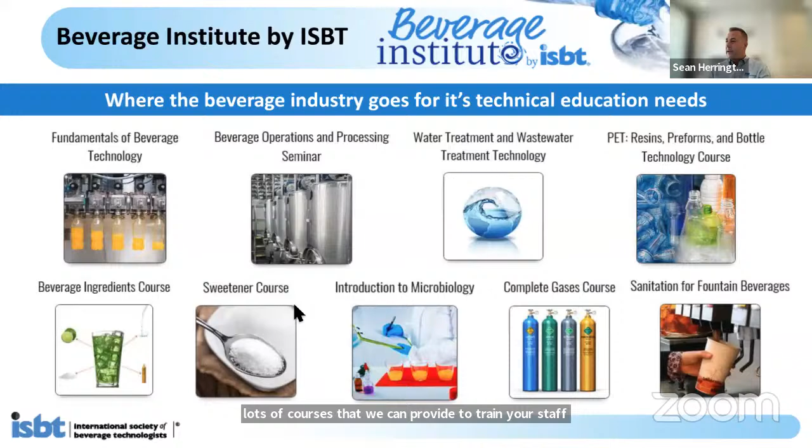So basically, ISBT is where the beverage industry goes for its technical educational needs. And we've got lots of courses that we can provide to train your staff if you have staff, or train yourself if you want to learn about a new aspect of the beverage industry. We're affiliated with many international beverage related organizations, as you can see on the screen here.

We have our main BevTech conference this year on May 6th to the 8th in Orlando, Florida, and you'll have about 350 technical experts there to connect and network. And this is all part of the membership that you subscribe to. You get access to this conference.

We have ISBT in Europe as well, LATAM, and as I said, we have ISBT BevTech Asia Pacific, which is my responsibility. And you can join ISBT quite easily through the website, and you'll be able to get access to all of the information related to ISBT and ISBT guidelines for the beverage industry. So please check our website and you'll get more information there.

So the content of my presentation today is, first of all, we're going to look at where your CO2 comes from, the traditional sources of CO2 and the emerging sources of CO2, because this landscape is changing rapidly, and I'll explain the reasons for that. We're going to discuss beverage gas quality and the food safety strategy that you can put in place to ensure that you produce a high quality beverage and maintain food safety. And then we'll do a bit of a deeper dive into CO2 polishing filters and their role in protecting beverage quality.

So where does the CO2 come from? Well, traditionally, CO2 has come from a number of fossil fuel sources. So probably the most common is fertilizer manufacturing, ammonia fertilizer, then hydrogen production, fermentation, combustion, and various different petrochemical sources of CO2. Now, all of these sources require, at some stage in the process, fossil fuel, i.e. natural gas or coal, to power the process of producing the CO2. Another common source, only in certain parts of the world, are natural wells. And of course, these are not fossil fuel because the CO2 comes out of the ground.

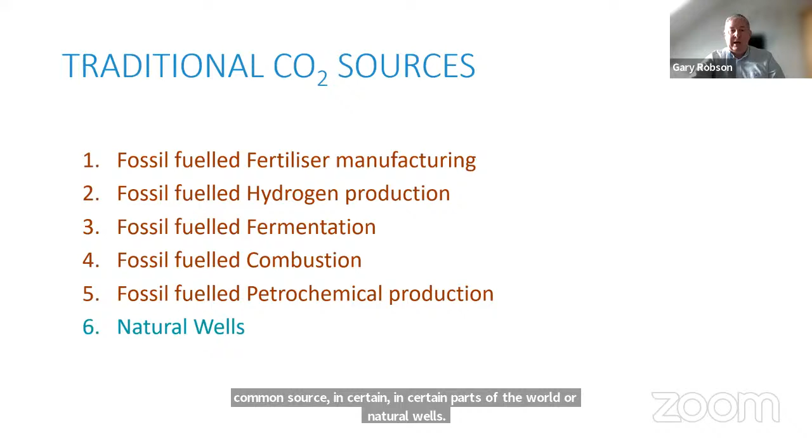So the disadvantages of traditional sources: first of all, they're primarily a byproduct. So if we take the fertilizer source, CO2 is a byproduct of that fertilizer production process. Of course, they're reliant on fossil fuel, and they're often seasonal. Manufacturing of the primary product can affect the supply chain of the CO2 from those sources. And this is very common in ammonia fertilizer, where it's only produced in certain months of the year. And in those other months, when it's not in production, then you have these problems with supply chain disruption.

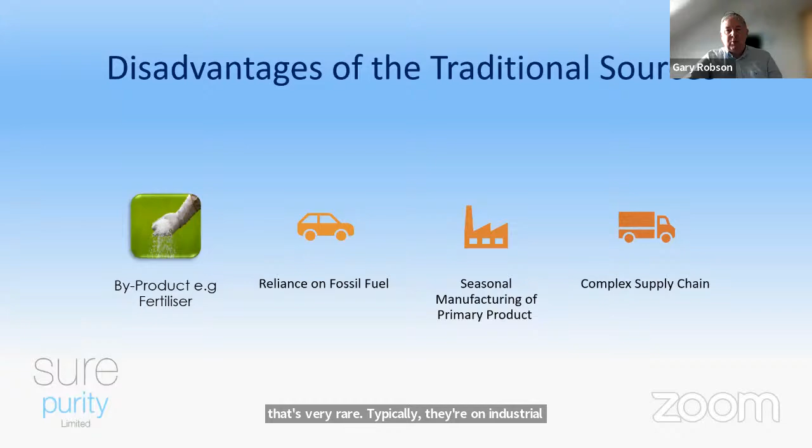The other effect of some of the traditional sources is the complex supply chain. So a lot of these sources are not traditionally near the beverage production. In some cases they are, but that's very rare. Typically, they're on industrial parks, far away from the population centers where you find the beverage production facilities.

But this is changing, and why is it changing, and why is there urgency to develop the new sources? Well, there's a number of influencing factors here, societal, political, economical, but the main pressing reason here is environmental. So climate change, the greenhouse gas reduction goals. COP28 this year launched a number of initiatives at government level for all governments around the world to accelerate the greenhouse gas reduction goals. And you're seeing the effect of this happening right now.

The other thing that's influencing this is carbon credits or fine avoidance on emissions. So a good example of this is New York City law, Local Law 97, which is coming into effect next year. And this requires any operators of large buildings, the landlords or the development companies, to reduce or eliminate the emissions from these large buildings. So if you think about Asia, there's a lot of cities with very tall buildings, and these could also follow New York's example of requiring a reduction or elimination of emissions from large buildings. Typically, these are coming from the centralized heating systems, which, for example, in New York, are all powered by natural gas.

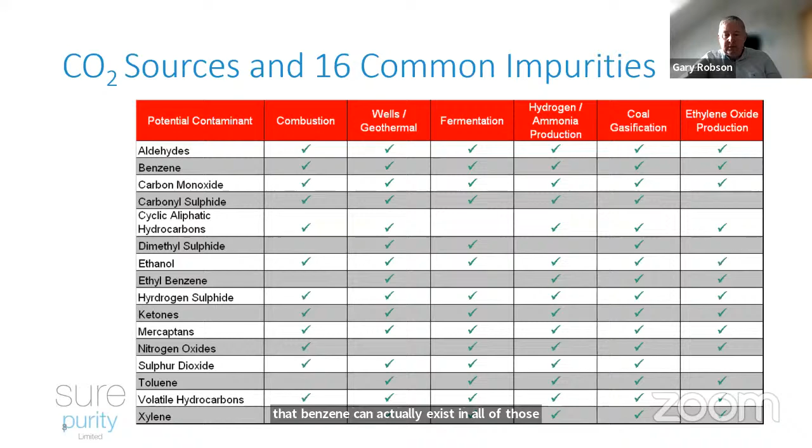Trace impurities in CO2 can cause a number of sensory negative impacts on your beverage. If I take just the four common ones, acetaldehyde, this is ever present in fermentation sources. And acetaldehyde presents an apple off flavor, which is probably fine if you're producing apple cider, but you certainly don't want it in a lemon lime beverage or even a carbonated water, where it would be even more distinguishable.

DMS and sulfur content, this is also extremely common. DMS you're going to find in typically fermentation sources, and particularly where it's a brewery, and it's the most common, I would say, contaminant in breweries that are fermenting and producing light lager, which is the #1 type of beer in the world. And the pale lager, highly carbonated beers you find around the world can produce the corn, sweet corn off flavor in some beers. Again, not something you want in your soft drink.

And then benzene, I already mentioned that this is probably the most common around the world. It causes the most problems. It is a toxic carcinogenic compound, and it is highly regulated. So this should not be in the CO2 at all. And it is also tightly regulated by the beverage brand owners and the CO2 producers, with the lowest regulatory permitted limit of 20 parts per billion.

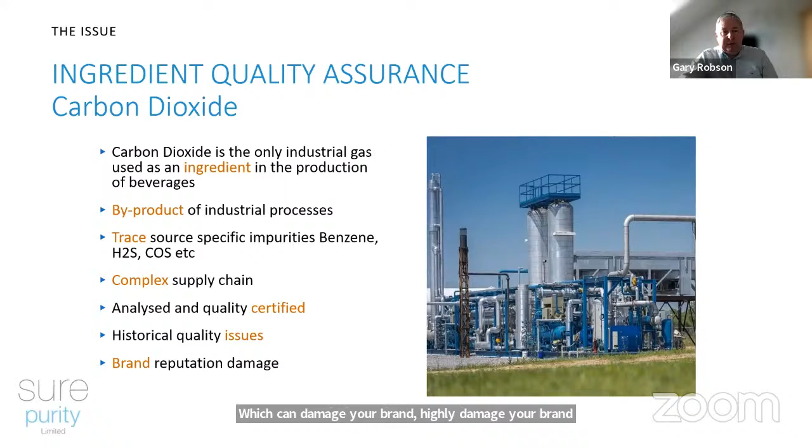This is important because there's been a number of historical quality issues, some of them pretty major events that have attracted very negative publicity, which can damage your brand, highly damage your brand. And with the speed of social media these days, that's even a higher risk.

So the developing new sources of CO2: first of all, we have biogas upgrading. This is probably the fastest growing new source of CO2, particularly in Europe and Western Europe and the UK. We're seeing an explosion of this production source, primarily for the biomethane. We had some major influencing factors in Western Europe because the war between Russia and Ukraine was affecting the natural gas supply chain. So there was another need really to accelerate the biomethane production that we see today. So this is on a huge growth curve, and doesn't look like it's going to slow down anytime soon.

And then there's direct air capture, which is gaining some traction, but is not quite exploding in the way that biogas is today. And then you've got also carbon capture from various emitters, so power stations, anywhere where you've got a source of CO2 that has high enough volume with a good enough starting purity to be able to purify and produce merchant grade CO2 in various different grades.

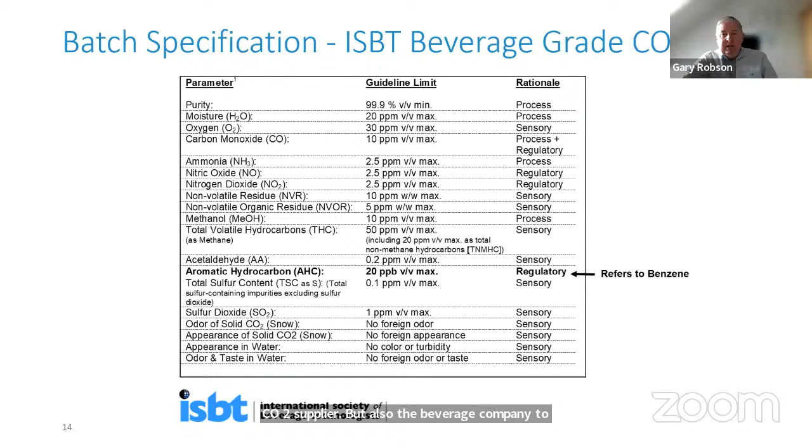So a lot of this on here, if it's a chemical impurity, can be monitored with a CO2 analyzer, a chemical analyzer. But there's a number of items on here like the appearance in water, the odor and taste in water. These are a manual test that should be done by the CO2 supplier, but also the beverage company, to ensure there are no sensory impacting impurities present in the CO2.

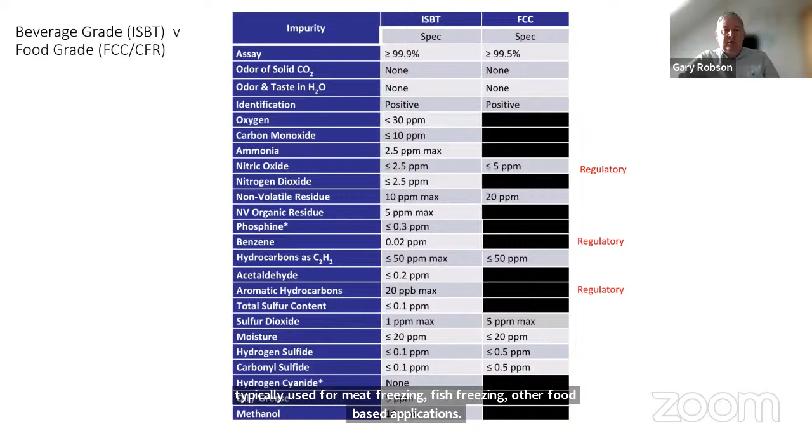of analysis. Things like acetaldehyde, aromatic hydrocarbon, and benzene, total sulfur. So these all should be included in the batch report and be able to be inspected at any time by the beverage company. So we always recommend not to buy food grade for a beverage application, because food grade CO2 is typically used for meat freezing, fish freezing, other food-based applications, where the CO2 is not actually used as a carbonating ingredient.

So quality from the beginning to the end, the gas source, the quality must begin at the source. Even monitoring the quality of the gas from the raw gas that's produced by the CO2 supplier. The raw gas producer and the CO2 company must always be in frequent communication and must always understand if there are any changes at all in the raw gas analysis, because that can affect the performance of the CO2 purification system from your supplier.

And you must understand also the seasonality changes or any new raw material variability that can affect that raw gas analysis and quality. A good example of that is sugar beets, where sugar beets are harvested twice a year, and the moisture content is different between the spring sugar beet and the fall or the autumn sugar beet, and this can have an impact on the quality of the CO2. So this all has to be considered in the process plant design in the CO2 purification system.

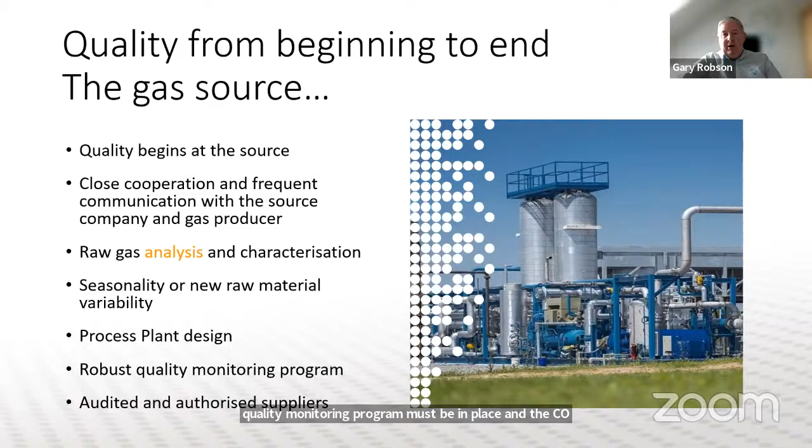A robust quality monitoring program must be in place, and the CO2 supplier must often be audited and only issued with an authorization to supply beverage grade CO2. The process plant design must be based on a worst case scenario with multiple raw gas samples tested, so a good fingerprint can be established and you must understand what could be in your CO2 at certain times of the year. The scrubbing and purification choices are then based on the best engineering practice, and so often it can be a proprietary design of the manufacturer.

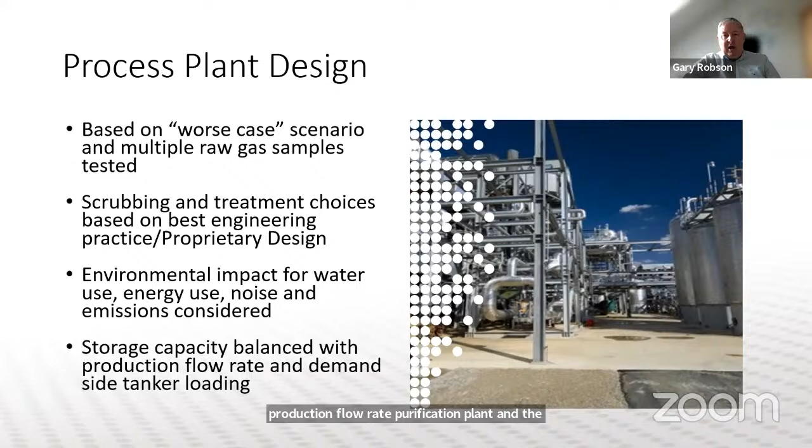You must think about the environmental impact for water use. You must think about energy use, noise and emissions. These must always now be considered and be high on the agenda for building a CO2 recovery plant. The storage capacity must be balanced with the production flow rate, i.e. the raw gas flow rate, the production flow rate of the purification plant, and the demand side. So how many tankers can be loaded on a daily basis.

At the CO2 production plant, the quality of the CO2 must always be monitored. A full list of impurities must be monitored in the batch. And the first place to start monitoring is the liquid to storage pipeline. This is the main pipeline feeding the tanks. So you can have an early warning if something is not right with the CO2 before you would contaminate the

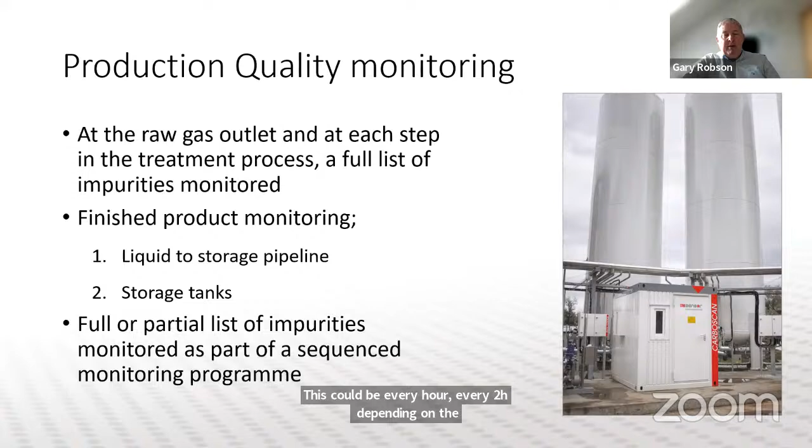tanks. You must always monitor the quality of the CO2 in the tanks because that's where your batch analysis is going to be completed. And you must have a full or partial list of impurities monitored as part of a sequenced and regular monitoring program. This could be every hour, every 2 hours, depending on the programming of the CO2 analyzer. So batch analysis, a full list of impurities must be monitored.

Best practice is to create a discrete batch analysis. You isolate the batch, release only after the test has passed, and then you identify this with a unique serialized ID and record this for future reference or for auditing. You can control the product flow in isolation with a PLC and direct communication to and from the analytical system and sequence that within the program. We recommend always having a high level warning at 80% of the specification, and that can provide an early warning if something goes wrong.

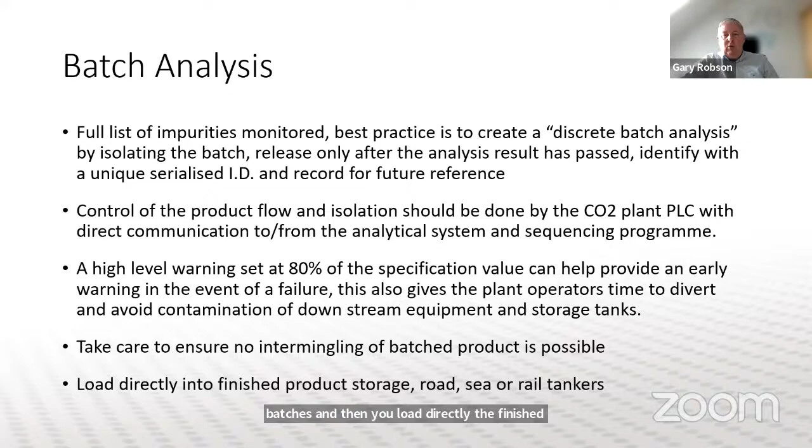Take care that there's no intermingling of product between batches, and then you load directly the finished product into the truck or a rail tanker. Every delivery must come with a certificate of analysis and a COC, a certificate of compliance, if you're a beverage brand owner and you require this, and this is a legal document that forms the contract between the supplier and the client.

The compliance statement must require detailed information about where and when the product was produced, by whom, record the batch ID, the vehicle ID, seal numbers. So all of the inlets and outlets on the tanker must be sealed with seal security numbers, ID numbers, and they must be recorded, tamper evidence seals. Driver ID and a statement that this is the full delivery and not a partial load. So this is the standard procedure now for delivering beverage grade CO2 to a beverage producer.

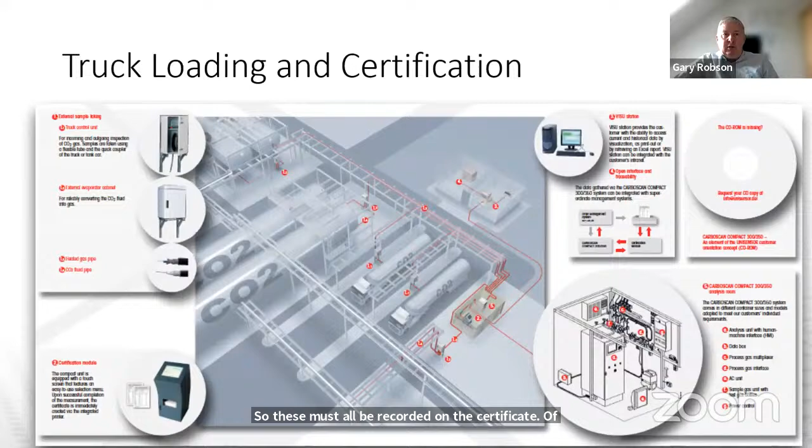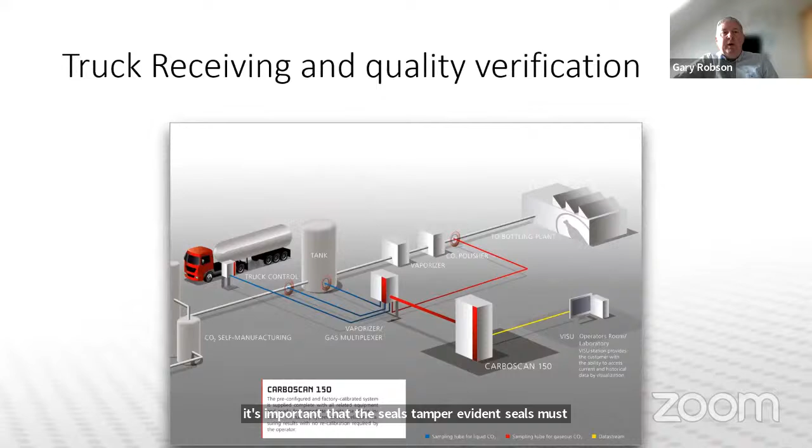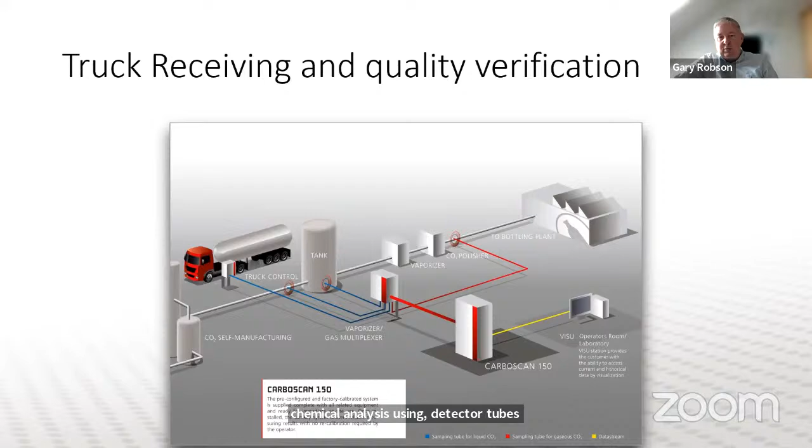Here's a quick overview of a truck loading and certification system. Again, the delivery vessel security, it's important that the seals, tamper evidence seals must be applied, and they must be serial numbered, and these must be recorded. When you receive a delivery of CO2, the quality must be verified. You can do this with an on-site CO2 analyzer, or you can do a simple sensory test and then do the remaining chemical analysis using detector tubes. But of course, it's much easier just to do it with an on-site analyzer. It's quick and easy and automatic.

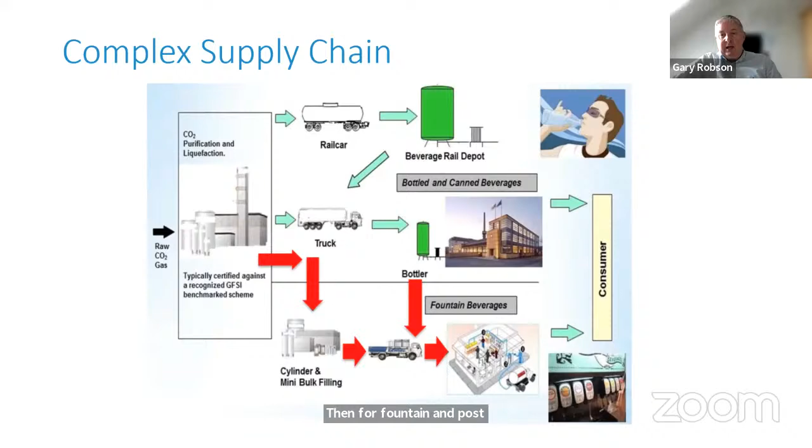The reason for that is because the supply chain of the CO2 is quite complex. There's a number of opportunities here for cross-contamination, and you can see from the beverage production facility on the left, by the time the truck gets to the beverage production facility, it could have gone through 2 or 3 changes of hands. If you're a restaurant operator and that CO2 is then broken down into smaller batch cylinders or mini bulk delivery, then for fountain and post mix, it can go through even more hand changes. So opportunities for cross contamination.

So all that being said, yes, we understand the risk of CO2, but there are a number of things you can do to protect yourself as a beverage company. And one of them is using multi-barrier polishing filters. These can remove all of the chemical impurities and the sensory impacting impurities that can be found in CO2. By using them, it ensures compliance with the global brand owner requirements. It standardizes the key ingredient, CO2. It prevents contamination of the carbonated beverages. It certainly prevents consumer complaints and any potential brand damage, any sensory defects, and avoids costly recalls.

The CarboGuard system from Sure Purity removes all of those impurities listed in the ISBT and the global brand owner requirements. In addition to that, there's enhanced protection with the carbonyl sulfide barrier. So this is quite important when the CO2 is coming from some of the newer sources, because these can have high levels of COS. The system works by continuously polishing, so continuously removing the trace impurities that are always present in the deliveries of the CO2, but it also protects you in the event of a spike or a quality incident, and it will protect you up to 10 times the brand owner specification.

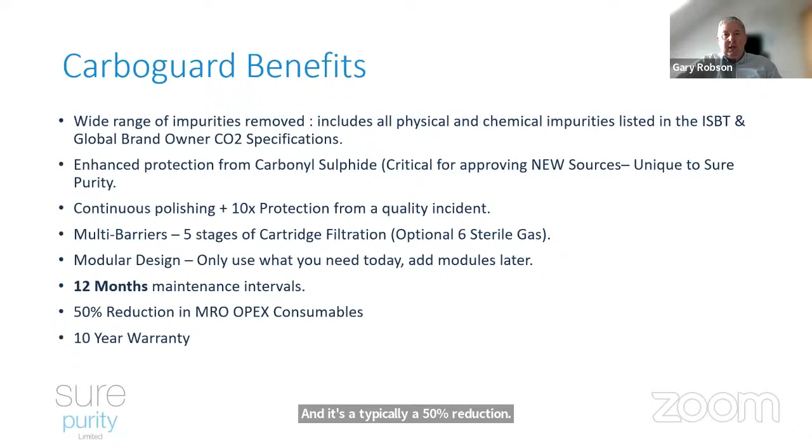The system is designed using a modular design technique. It only uses the capacity that you need today. And because it's modular, you can add on additional modules as you're adding extra lines. The system works with a 12 months maintenance interval, and it's typically a 50% reduction in your OPEX consumables compared to traditional CO2 filters. And the system comes with a 10-year warranty.

So this is a quick overview of how the system works. You can see you have stage 1. This is cleaning the CO2 of any physical impurities like NVR, NVOR. What that stands for, that's an ISBT term, non-volatile residue and non-volatile organic residue. These are removed here at stage 1.

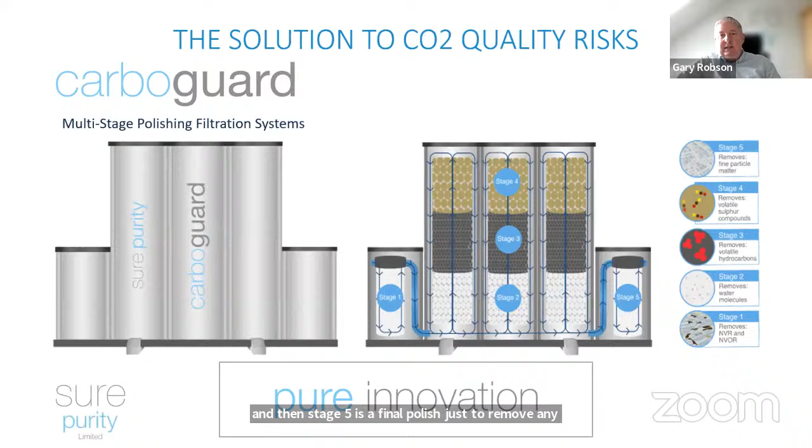This is typically oil, dirt, rust, grease, plasticizers, because liquid CO2 is an excellent solvent and it can strip the plasticizers out of rubber hoses and seals. Stage 2 is removing moisture and some light hydrocarbons. Stage 3 is removing the volatile hydrocarbons, including benzene. Stage 4 is removing the volatile sulfur compounds. And then stage 5 is a final polish just to remove any fine particles, which then leaves the CO2 completely pure and free of any impurities.

It's a cartridge-based system, CarboGuard, and we're using a snowstorm filling technique. The snowstorm filling technique ensures an equal resistance to flow through the media beds, and this ensures maximum contact time between the CO2 and the media, and ensures that no bypassing or channeling, like you can see on a traditional bed, can take place. It's 12% more efficient, and it enables us to get more media into a smaller space.

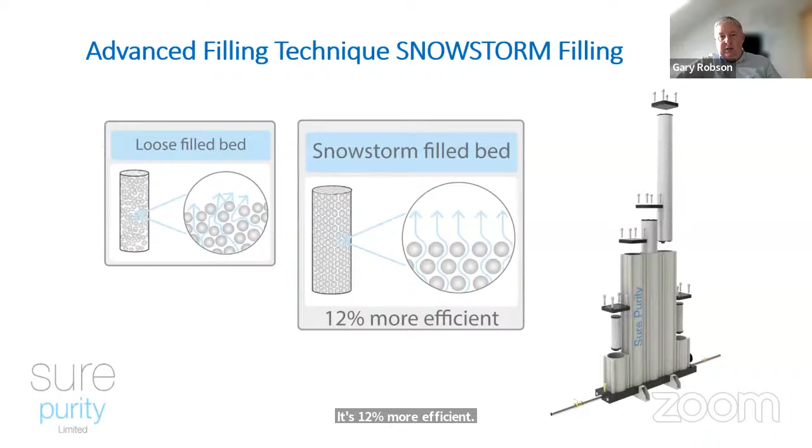The unique COS barrier is used to stop any carbonyl sulfide from passing through the bed, through the filter. This is important because COS is extremely difficult to remove. Many CO2 companies cannot remove COS in much more than very small trace amounts, because it can quite easily overwhelm and overcome the CO2 purification process. So this media was specially developed by Sure Purity, and it has excellent properties for the continuous and permanent containment of COS.

So the brand owner requirements: for example, Coca-Cola has required every one of its bottlers in the world to use multi-barrier polishing filters since 2001. PepsiCo also followed in 2018, and they also require all of their bottlers or contract fillers, co-mans, to have the multi-barrier CO2 polishing filters. And this is because it has prevented many quality incidents from occurring.

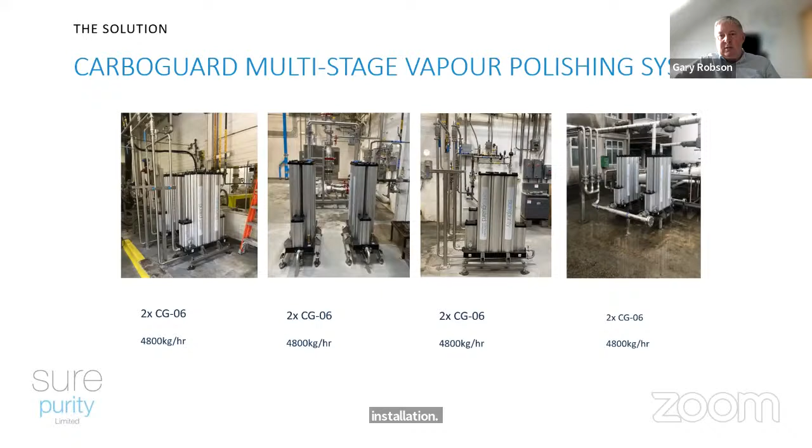So here's a few pictures of some installations around the world. You can see that it's a really nice, clean installation. These are a couple of duplex installations where the customers have chosen to install 2 systems on the same CO2 plant. And these can be easily configured and connected using an end-fed manifold pipe arrangement, which you can see here in the middle picture.

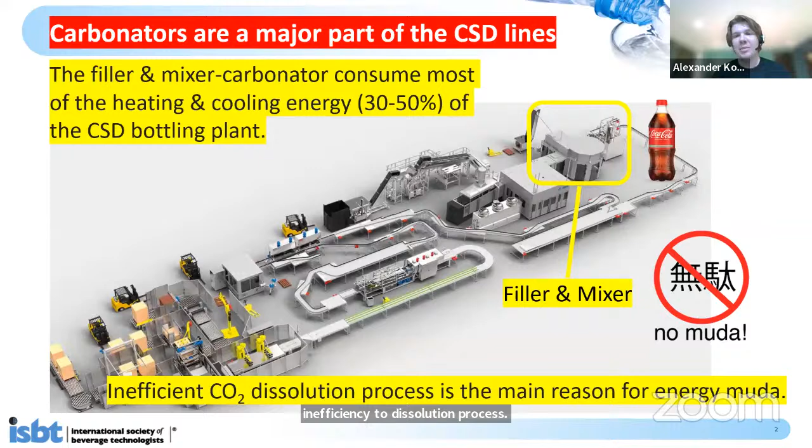The problem is that during the process of manufacturing, somewhere between 30 to 50% of heating and cooling energy is consumed in the bottling plant. This is an enormous amount of muda, an enormous amount of waste, and the reason for this waste is the inefficient CO2 dissolution process. So basically, the carbonation process is responsible for most of the energy waste in the plant.

You may ask the question, what is a bad CO2 dissolution? We may think together of the molecular structure of water as a sponge. So a bad dissolution is when the outer layer of the water molecules is carbonated and not the core. You may see that here are the CO2 molecules attached to the water drop. Let's say that this is a water drop, and the CO2 molecules cannot go inside the water drop.

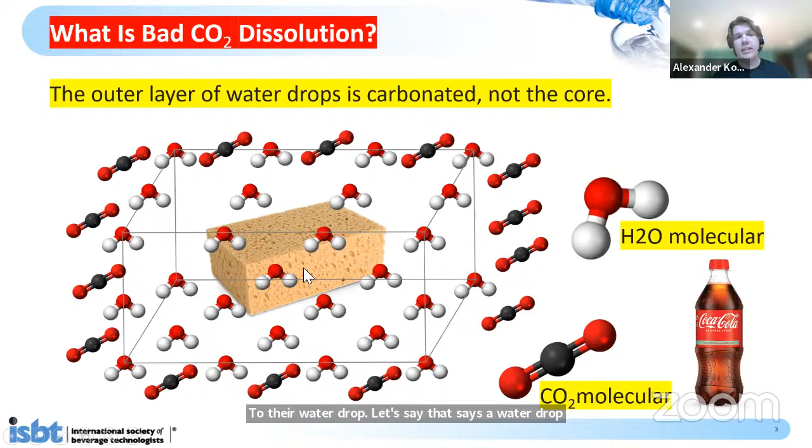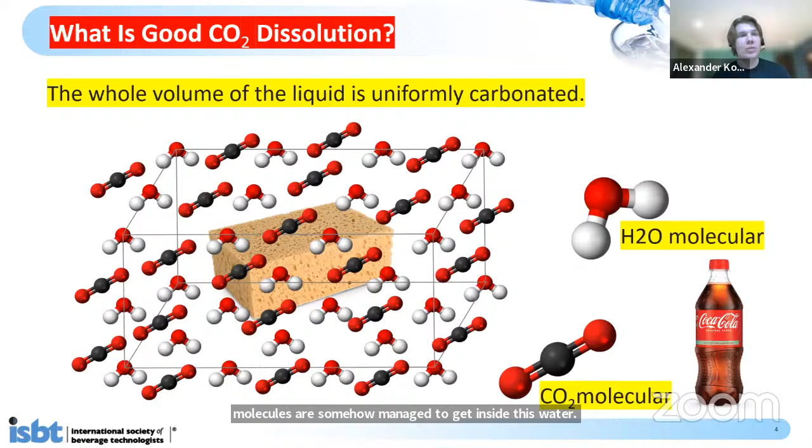This is bad dissolution. What is good dissolution then? A good dissolution is when CO2 molecules somehow manage to get inside this water drop. It means that the carbonation is uniform, the whole volume is uniformly carbonated. This is a good CO2 dissolution. There are a couple of ways to improve CO2 dissolution.

The first and the most obvious one is to increase pressure, as according to Henry's Law, the increase of pressure improves dissolution. This is quite costly, and it also causes some wear and tear on your production equipment, especially on the filler. The fillers become worn out easily when the pressure is high. The second thing to improve the CO2 dissolution in beverages is to apply cooling. This is also an obvious step, which requires a lot of CapEx and OpEx expenditures, although most of the plants have some sort of a cooling system. It's OpEx because you need to spend energy for the cooling process.

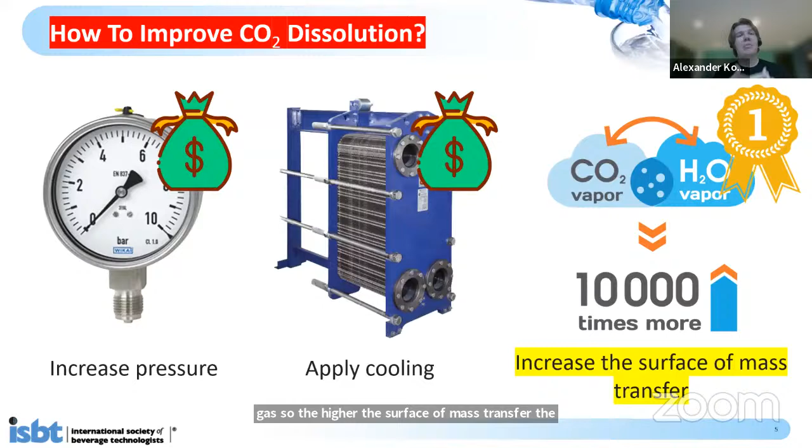And the third step, which is also obvious, I must say, is to increase the surface of mass transfer between the liquid you are trying to carbonate and the CO2 gas. So the higher the surface of mass transfer, the better the carbonation, the better the bonding, and the better the CO2 dissolution. And obviously, there are different apparatuses and processes such as injectors, ejectors, static mixers, which are used to increase the surface of mass transfer between the liquid and gas. They work with varying degrees of success.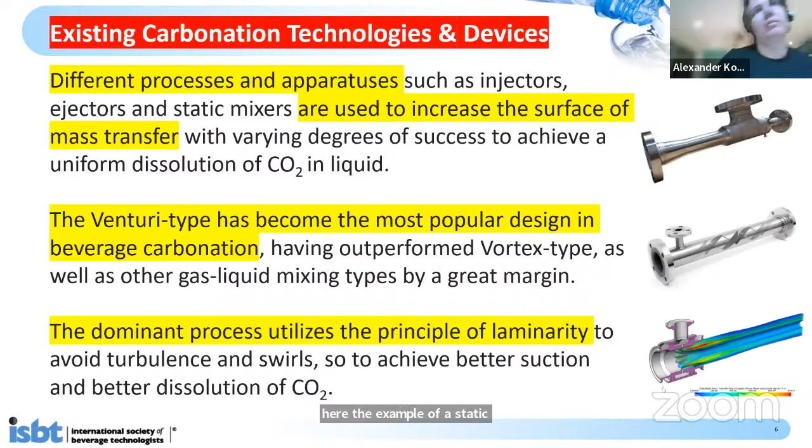Currently, the most dominant design is the ejector type machines, which utilize the principle of laminarity, the Venturi type machines. And they have outperformed the static mixers. You may see here the example of a static mixer, and the static mixer is sort of outdated, old age technology. Let's focus right now on the new technology, which is currently on the market.

It's the subcarb technology. It's a patented technology and apparatus, which is designed, contrary to the ejector type machines, for very high turbulence, very high pressure drop in line, and it's designed to achieve a speed of the liquid higher than the speed of sound in this liquid. It means supersonic speed. When all three conditions are met, we achieve the effect of cold boiling. It means that we vaporize any liquid like Coke, Pepsi, or mineral water, any liquid you'd like to carbonate, and you mix gas with gas.

Basically, the subcarb technology allows carbonating gas with gas, because think of Venturi. Venturi is carbonating liquid with gas. It means that it's carbonating water drops of smaller size. So the smaller the size of the water drop, the better. And it is still liquid.

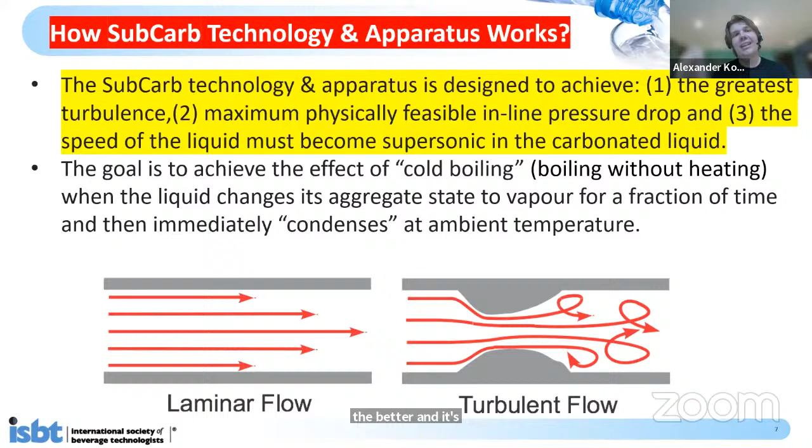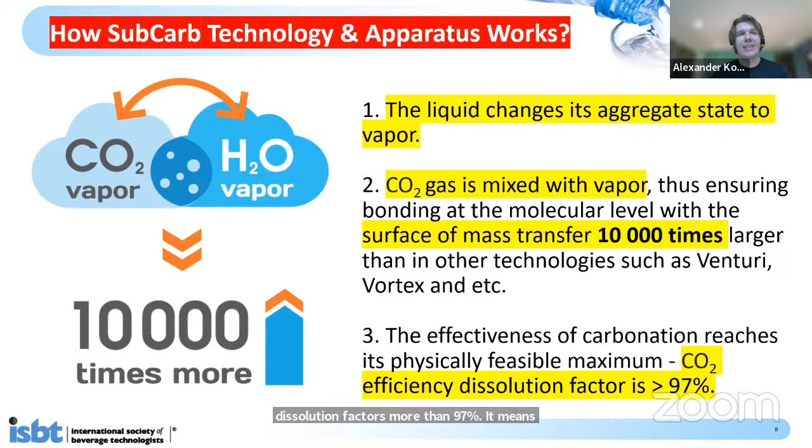In the case of the subcarb, it's gas mixed with gas. That's the main difference. Basically, in the subcarb technology, the liquid changes its aggregate state. CO2 is mixed with vapor, and the dissolution efficiency factor is more than 97%. It means that the theoretical level of CO2 dissolution has now been achieved in practice.

Let's say that we get a lot of questions: what does 97% efficiency mean? I have stated it, but this is a CO2 dissolution table. Let's say a couple of words more.

And Henry's Law says that 4.6 bars, this is the pressure scale, 4.6 bars of gas counter pressure in your filling machine allows you to fill Coca-Cola products, let's say, or PepsiCo products, it doesn't matter, just for the reference, with 4.2 volumes of carbonation. So 4.6 bars allows you to hold 4.2 volumes of carbonation at 25 degrees filling temperature.

Normally, it's impossible to fill at this high temperature in reality. Yeah, but theory says it's possible. And when is it possible? You need two factors. The first one is that the carbonation technology must deliver 100% efficiency. So it means that the theoretical efficiency is in reality the same as the real efficiency.

And when the filling technology doesn't have design flaws. Obviously there are different types of filling equipment, volumetric machines or mechanical machines; volumetric machines are way better. But nevertheless, Henry's Law says that it's possible to fill at 25 degrees Celsius. It's net zero manufacturing. It's not even ambient temperature filling, it's more than ambient temperature filling.

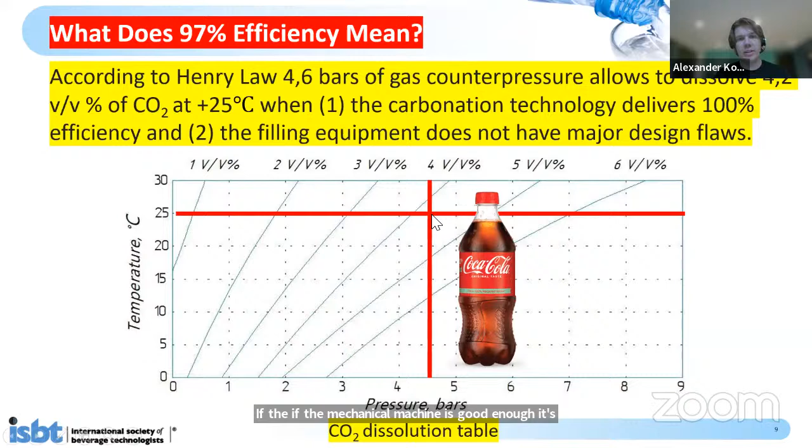And the modern beverage carbonation technology allows this, for example, in connection with volumetric machines or decent mechanical machines. If the mechanical machine is good enough, it's possible to achieve this filling temperature on very high carb products.

There are 3 steps. We'll go quickly through these 3 slides about the subcarb technology difference and how this super efficient dissolution happens. The first step is you need to convert as much kinetic energy to potential energy as possible. So you need very high speed in order to get extreme turbulence. This is contrary to any Venturi type ejector. In the Venturi type, you want all the flows laminar. In the subcarb technology, you need extreme turbulence.

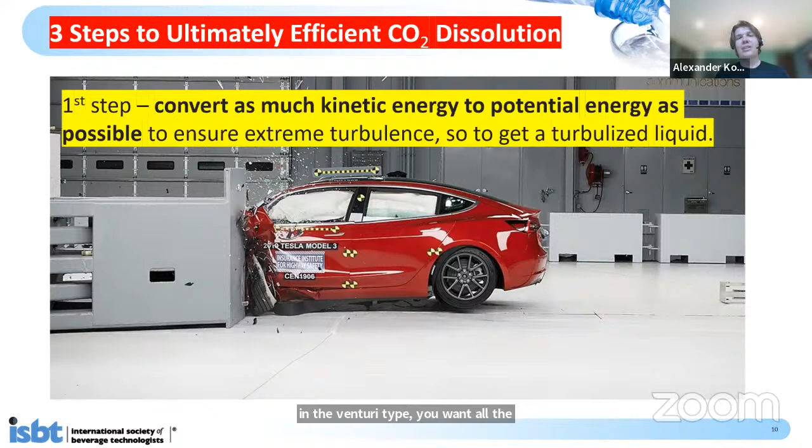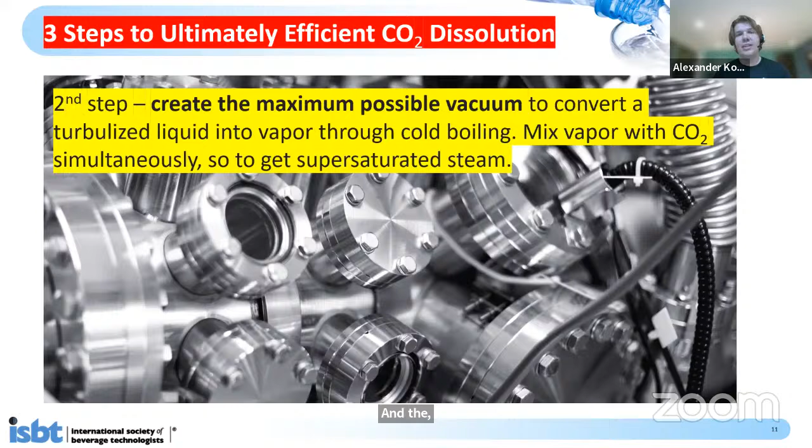Then there is a second step. You need vacuum, obviously, but the main difference between the subcarb tech, which is patented, and the Venturi type devices, is that the vacuum is created abruptly. It's an abrupt pressure drop. So first is the turbulent flow, then there is an abrupt pressure drop, and the liquid vaporizes. It means that it changes its aggregate state, and the new state is wet supersaturated steam. It means that it's gas.

Then the third step is that you need to somehow condense the components of the product back to liquid, because you have some precious formulation of Coca-Cola, PepsiCo. So you need to bring it back, and you need a very abrupt pressure increase, which is basically a hypersonic leap. It happens when a jet reaches the speed of 1 Mach, there is a hypersonic leap effect, and we condense the supersaturated steam back to liquid.

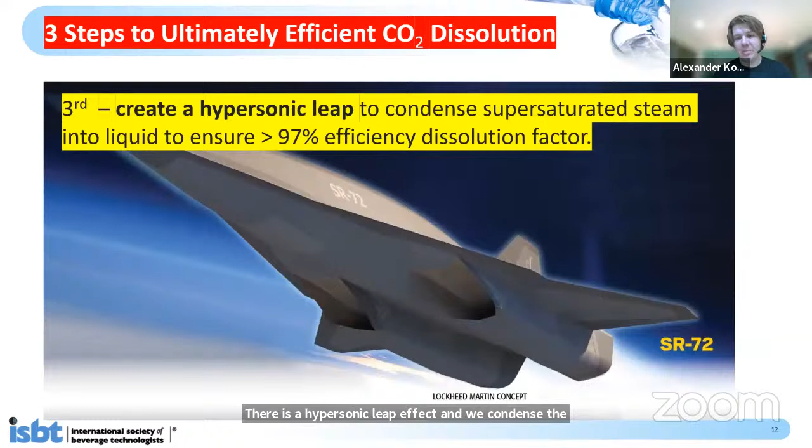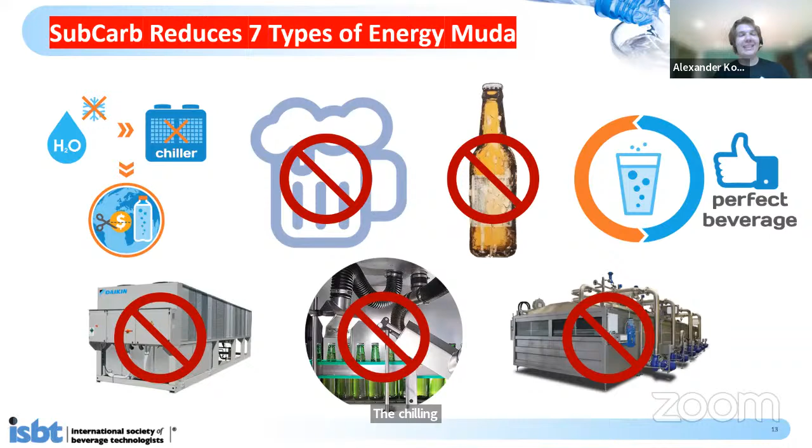What does it all mean for beverage manufacturers, the application of the new technology? It's the reduction in chilling costs, which is cooling energy, the reduction in heating energy, so the complete elimination of warmers, or like 10 or 20% usage of the warmer, the elimination of foam and condensate, the improvement in taste, and in case the facility needs to replace the chilling equipment, it can buy a significantly smaller one, or it doesn't need to buy one at all.

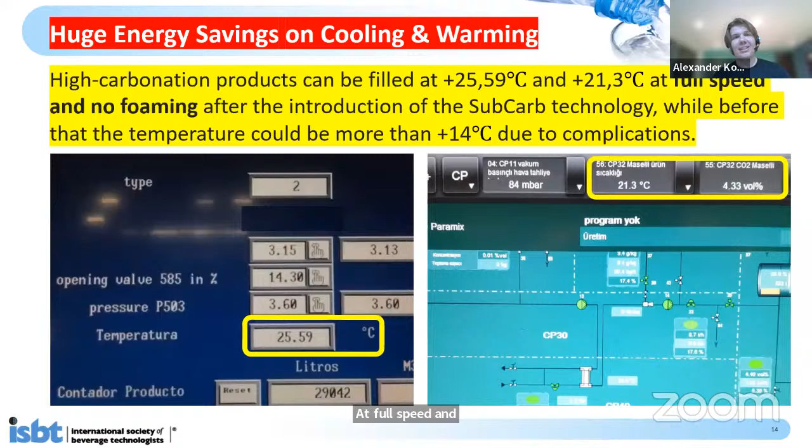So here are a couple of slides about the results that have been achieved around the world with the new technology, and in Asia as well, through many installations. This is the filling temperature, 25.5 degrees Celsius, or another example, 21 degrees Celsius, 4.3 volumes of carbonation. This is a typical Coke or Pepsi type drink. At full speed and no foaming, because speed reduction is obviously the greatest sin of all. Nobody will allow speed reduction. This is another example of a canning line, also very high temperature.

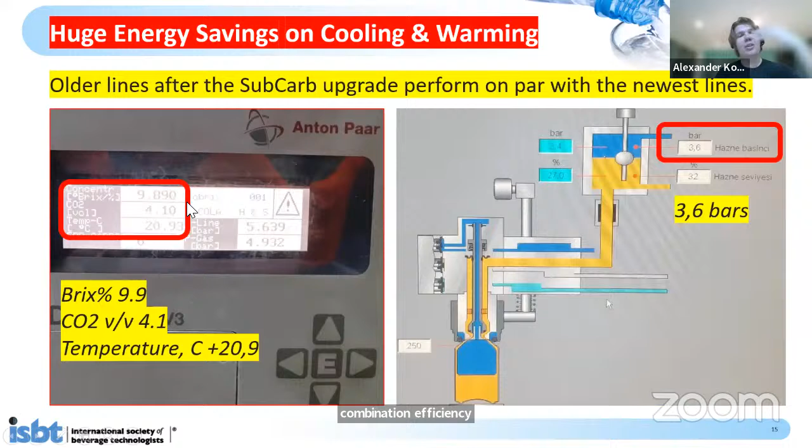This temperature helps us understand that right now, with the introduction of the new carbonation technology, the subcarb technology, the real carbonation efficiency is very close to the theoretical efficiency.

The very high savings can be obtained when you turn off the warmer completely or the chilling system completely, depending on the price. And this is an example that this can all be calculated very easily, depending on the efficiency of the chiller and the cost of energy in the particular region. Let's say in Australia, the cost of energy is very high, and the payback can come within a matter of months, depending on the production volume of your line.

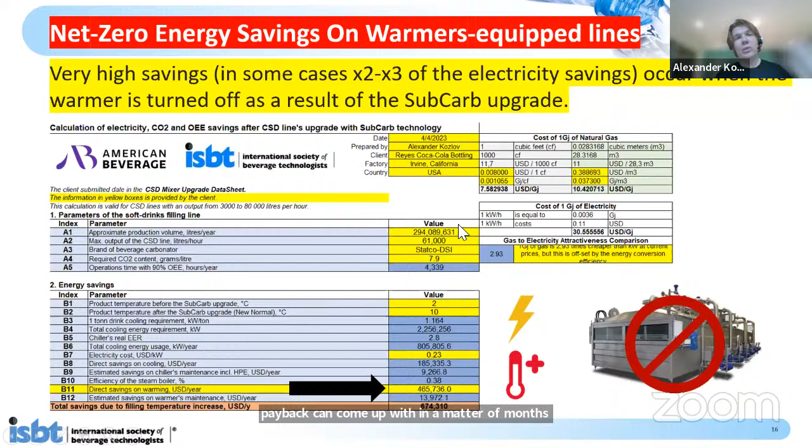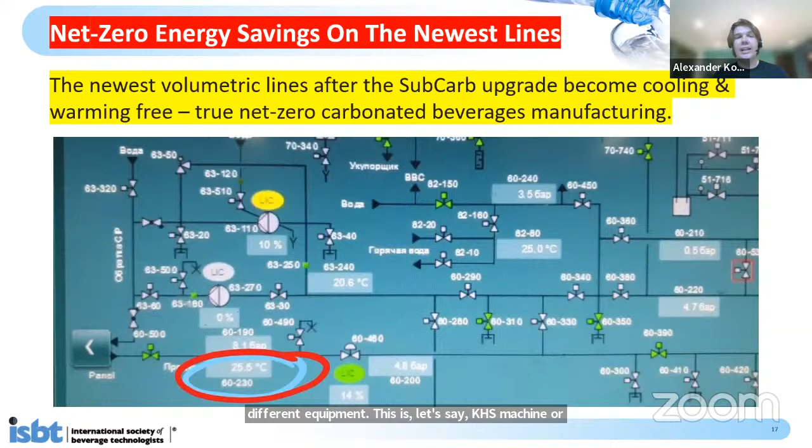Another example, 25 degrees Celsius, different equipment. This is, let's say, a KHS machine or Krones machine, whatever machine is typical for your operation. The improvement in quality, especially for PET containers, because of the better CO2 bonding. This is very interesting for hot climates, because during transportation, when the factory brings its product to the consumer or the supermarket shelf, temperatures can rise to 50 or even 60 degrees Celsius on a hot day, and the PET container can be deformed.

This is very important, especially in times of the global shortage. This is a typical layout of the two machines. This is a filling machine. This is the mixer carbonator. Both machines consume a certain amount of CO2. In the example here, both machines consume an equal amount of CO2, something like 10 grams per liter. This is true for canning lines in particular. And 100% CO2 efficiency is when whatever goes in the can is consumed by the machines, which is a rare case. Normally, this amount is lower than the total consumption by these two machines.

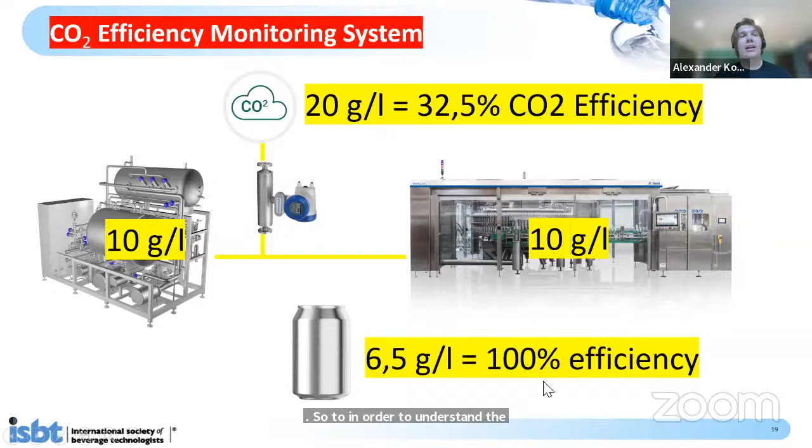This is an example of a simple system. You may see here the screen. This is a real example from a KHS canning line, 1,000 cans per minute, not a very fast one. The line consumes 600 kilograms per hour, which is a very, very big consumption. You can see to the left this indicator. This is the consumption of the filler, around 200 kilograms, and this is the consumption of the mixer, around 400 kilograms. And this is the total consumption, more than 500 kilograms per hour.

And after the introduction of the new subcarb technology, with all the parameters being the same, I mean product, speed, carbonation, you observe that the consumption became around 250 kilograms per hour, which is a very, very dramatic decrease. This can be true when the counter pressure gas in the mixer and the filler is CO2. When it's sterile air, the reduction of CO2 consumption is not that dramatic.

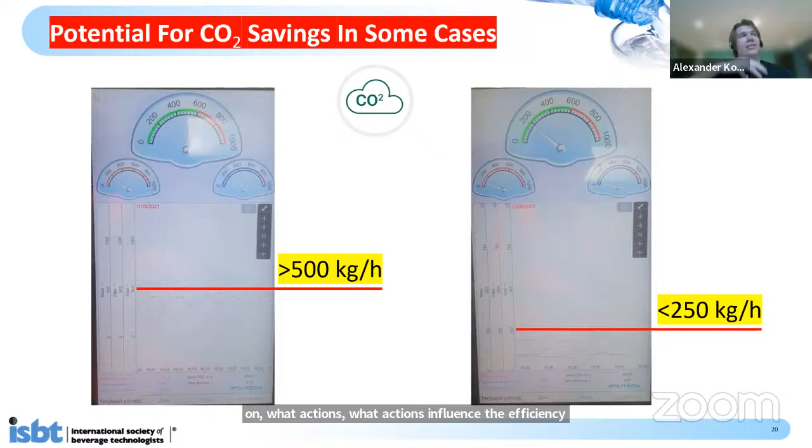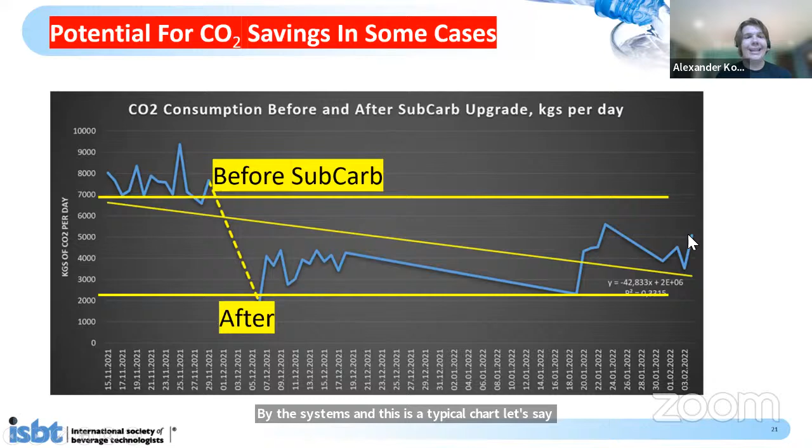So my value proposition is that right now, most plants have 3, 4, 5, even 6 lines. I've seen a plant with 12 lines in Mexico, and there is a big plant in Brazil. Each and every line must be equipped at least with a simple CO2 monitoring system, with all the data, historical charts and trends, so you can understand what's going on, what actions influence the efficiency. Is it the operator? Is it some fault? Is it leakage? Different charts can be generated by the system, and this is a typical chart. After the introduction of the technology, you observe a decline in CO2 usage.

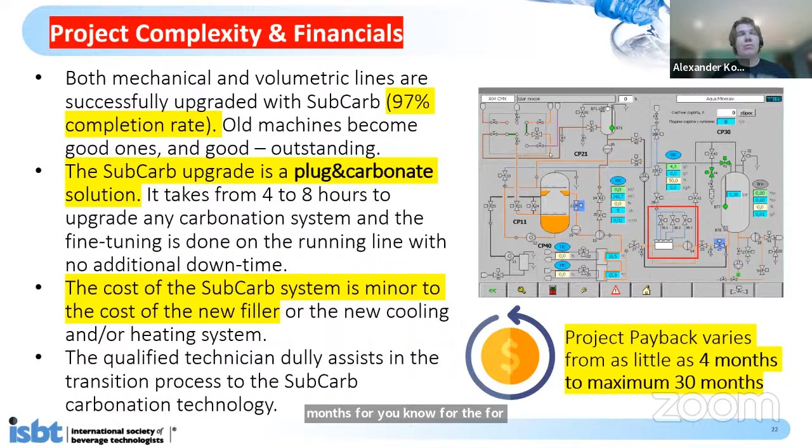If the operation is equipped with a very old machine like a Mojonnier type machine, Mitsubishi machine, or very old machine, these very old and sometimes bad machines, not because they are simply bad, but because they are outdated, will become good machines with the help of the new carbonation technology. The paybacks are pretty good as well, sometimes as outstanding as 4 months, and the payback never exceeds 30 months, and it depends mostly on the volume and the cost of energy resources.

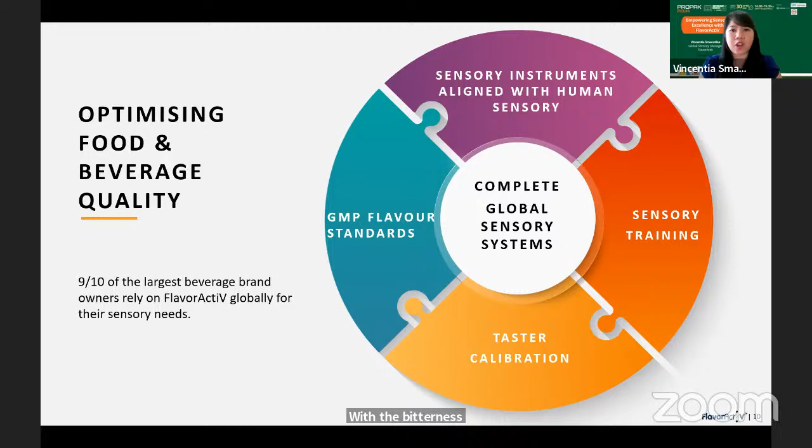So talking about the power of a sensory program. So what is the value? First, it is to protect the brand sensory quality, to promote product consistency, to reduce product variability and defects, staff empowerment in decision making, swift quality control, root cause analysis and troubleshooting, and new product development and recipe formulation.

And as a company, you can have some reflection on value by answering questions like, what does your sensory quality look like? Is sensory data discussed in the operations or managers meeting along with all other data? Are consumer or customer complaints reviewed and discussed relative to production or ingredient COA records? Does the word liking or subjective come up? So sensory is the tool that measures overall product quality and is often not given enough visibility.

That's why it's important to have a sensory program buy-in with the strategy and structure as below. So first, to assess organizational capacity, like the people, the space, the time and materials needed, and then elect a sensory champion that has the passion and skill set, also relevant job title, and establish the stakeholder buy-in with management support, a quality team, and also marketing involved. And last, to define goals. So what questions are you trying to answer with a sensory program?

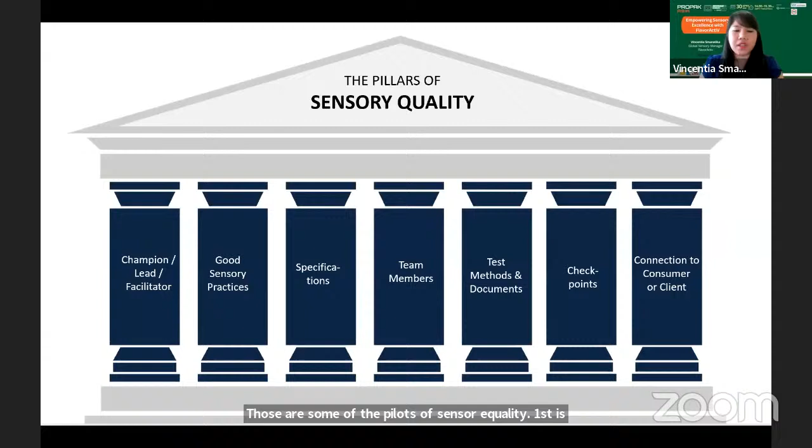Those are some of the pillars of sensory quality. First is the champion or lead or facilitator, good sensory practices, product specifications, team members, test methods and documents, checkpoints, and connection to consumer or clients.

And to have an effective sensory quality program, first, it needs to be feasible within staff and time restraints, integrated into the quality program, procedure, and daily activities, use appropriate methodology and decision criteria to provide actionable results, and build a sensory culture at all levels of organizations, have the right people with the right skills. And for a sustainable sensory program, it needs clearly outlined process and responsibilities, use the right methods and procedures, monitor and review, measure the team performance, and do reward and recognition of team performance.

And in sensory panel management, it's very important to pay attention to good sensory practices. One of them is environment. So have you got an environment that is free from distractions? An example here is the sensory laboratory. You need to have a separation between panelists. So you need to have separated tasting booths, which are also separate from the preparation area. Therefore, the panelists can really focus on the sensory evaluation, free from all distraction outside.

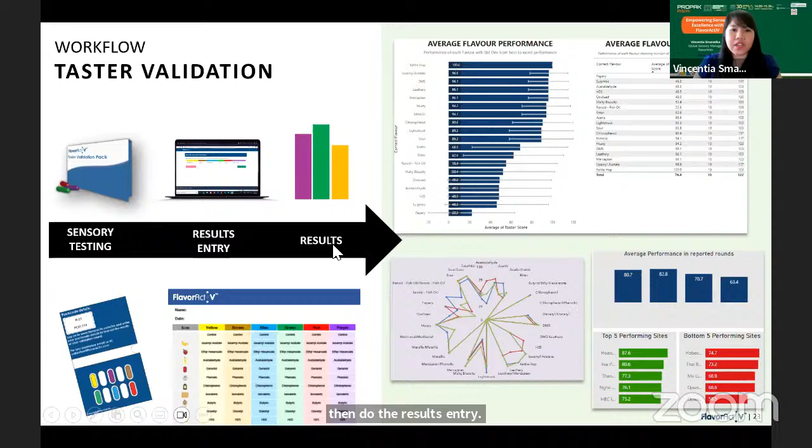And we can see the workflow for the proficiency testing. First, do the sensory testing with the capsules, then do the results entry, and then see the automatic results directly from the website.

For the proficiency testing program, there are 4 levels. Level 1 is the easiest one. It is in-out, to test the ability to identify defects outside of product specification. Level 2 is conformance, a rating guide for whether a product meets specifications and standards, and if not, naming the specific defect. Level 3 is flavor identification, to test the ability to identify specific flavors. And level 4 is rank rating, to test the ability to scale the intensity of flavors.

So to wrap up the presentation today, I'd like to let you know the best practices to have transformative power of a sensory program. First is to do the training: screen and train the panel leader and also panelists. Second, to do the monitoring by regular proficiency testing to monitor panelists' individual sensory capability.

Third, to maintain panelists by referring to training and proficiency testing results and keep reliable panelists. And the last stage is to improve by doing refreshment sensory training and also proficiency testing score improvement. And then this will be a continuous loop where you need to train, monitor, maintain, improve, and then train again, especially if you have a new team member or new panel leader, and you need to maintain the loop continuously because the sensory program needs to be sustainable and effective.

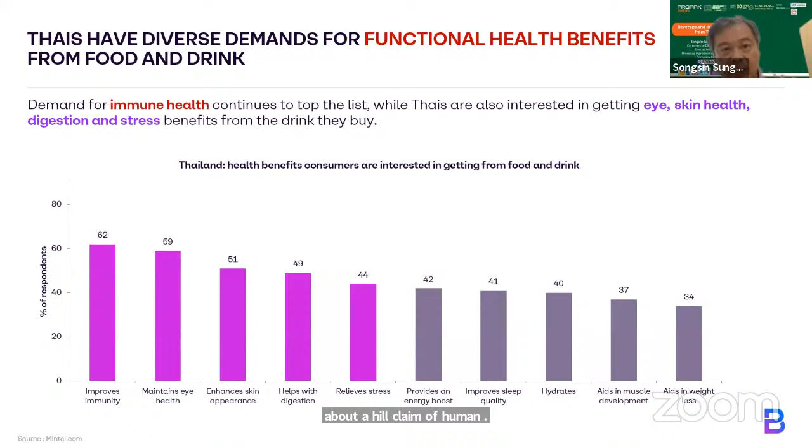And when we are talking about claiming health benefits, I think we have to look into the new regulation from Thai FDA as well. Just recently, Thai FDA announced 4 new regulations, which are going to be enforced on July the 2nd. They are notification numbers 445, 446, 447, and 448. These are about nutrition labeling, GDA guideline, health claim, and food supplements.

What is the purpose of this new announcement from Thai FDA? It is very simple. Thai FDA wants to ensure that whatever product claims any functional health benefit is a good product. And what are good products? This is from notification number 447, appendix number 4. They will focus more on this if you want to declare a nutrition, health, or functional claim.

There are a total of 5 items or categories that they need to ensure their product does not exceed in the case that they want a health claim. The guideline is fat more than 13 grams or saturated fat more than 4 grams, cholesterol, sodium, and total sugar, especially total sugar. If this product contains more than what is mentioned by the regulation, you have to make a big label to ensure that consumers are aware of it.

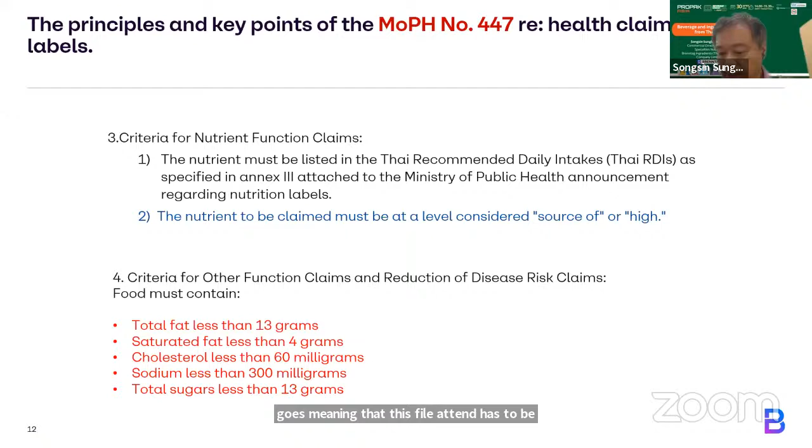And then 448, this is also interesting. This is for the supplement only, but it also gives a big impact to the food industry because they are revising the RDI for the micronutrients. Some of them are increased, some of them are decreased, but I highlight one item, which is vitamin C. You can see that in this new regulation, the RDI increased for vitamin C from 60 milligrams to 1 gram or

1,000 milligrams, much higher than before, meaning that if a food supplement or functional beverage wants to claim high vitamin C, they have to add much more vitamin C into their product. And the consequence is that the cost will be much higher if you want to claim. All right.

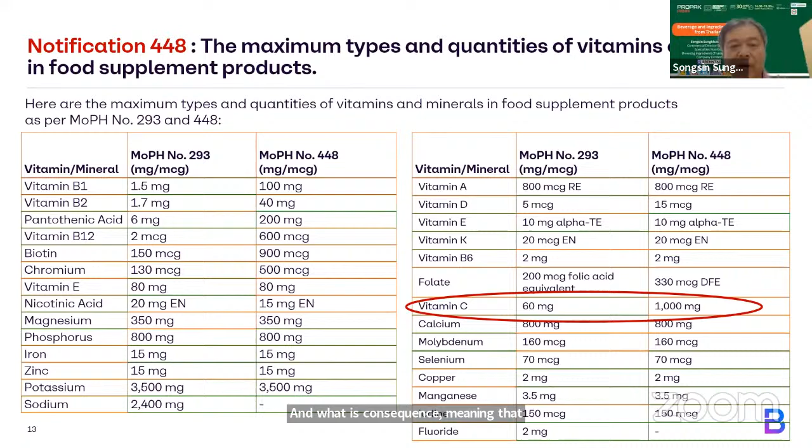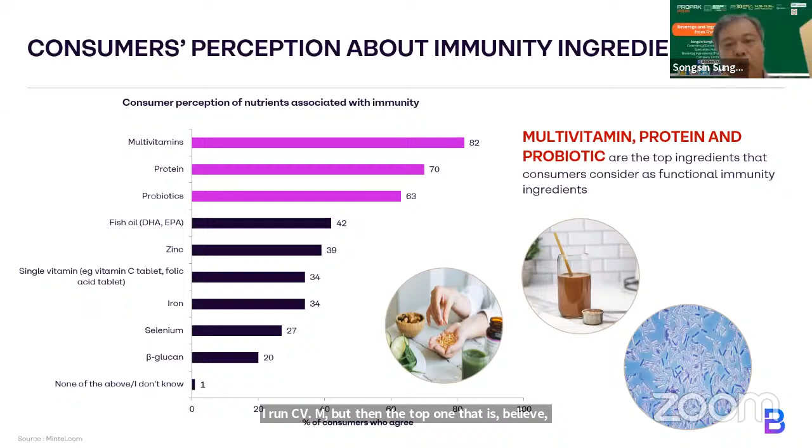They are all micronutrients or some of the protein, probiotic, iron, selenium, beta-glucan. But the top ones that consumers believe contribute to better immunity are multivitamin, protein, and probiotic. Okay, and then when we are talking about

the Thai consumer, they have a busy schedule and lack of time to consume proper food. So Thai consumers, especially the generation or people with a little bit higher status who can afford to buy a supplement, will consider buying multivitamins. And you can see on the right hand side the vitamins considered by food and beverage producers to add into their products, and vitamin C comes up very high.

As number one, as you can see, there's a lot of vitamin C beverage in the market at the moment, and those will have an issue after the new regulation is enforced because vitamin C has to be increased. Of course, there is a grace period of 2 years, but after 2 years, you have to add much more vitamin C to your products. And vitamin C is also considered an antioxidant along with vitamin E, which also helps in terms of immunity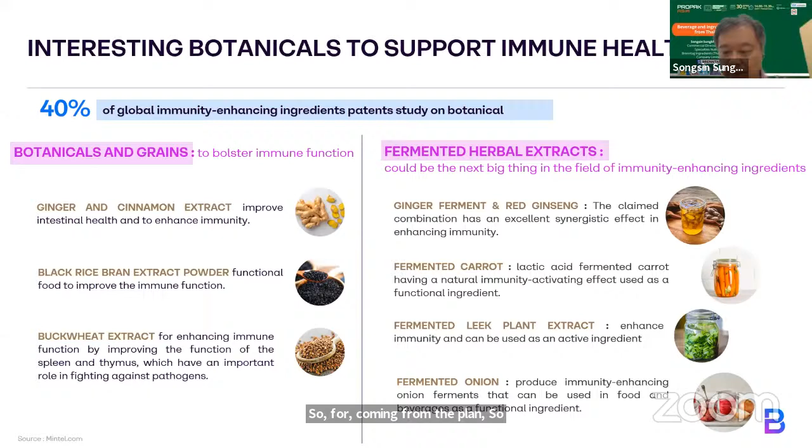Products like ginger, cinnamon, black rice bran extract, buckwheat extract, ginger ferment and red ginseng, fermented carrot, fermented leek, fermented onion. So a lot is also related to fermented products as immune enhancing ingredients coming from plants or botanicals. So I'm going to quickly introduce one product that is very special and is coming to commercial in Thailand very soon, which is cordyceps, gold cordyceps.

You may say cordyceps is already very old, but in fact, this one has a very specific technology to bring out the very pure active ingredient of the cordyceps, which is also backed up by a study confirming that if you consume the product with the active cordycepin at only 2.85 milligrams a day, you will be very good in terms of your health or immune system. You have a very good immune system to fight everything that is happening nowadays.

which is part of the scientific industry, I mean the ministry, which funds all kinds of new inventions from the university, and they are guiding together, and it is also supported with funding by the Thai oil company.

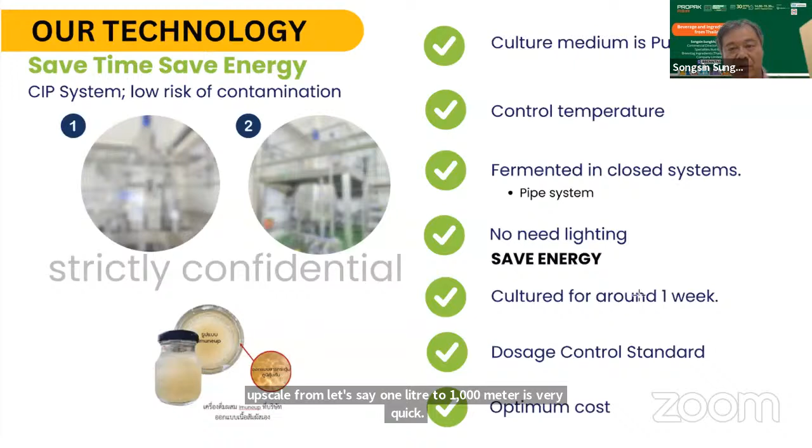Fermentation is also in a closed system, so it's very hygienic. Also, fermentation doesn't need light, so it also saves energy. And the turnaround of the culture scale-up from, let's say, 1 liter to 1,000 liters is very quick. And then the dosage is also very standardized, as I already mentioned, and the cost is optimum. Also, the Thai FDA has already approved it for use in supplements and beverages in sealed containers.

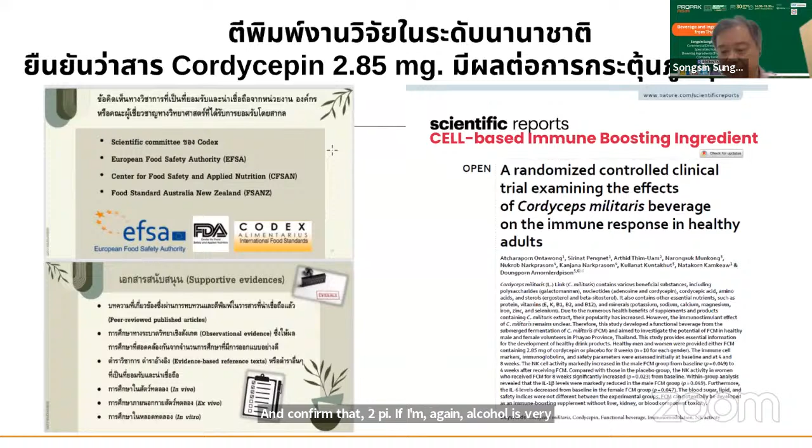And this is their study. They already did the study and published this paper. The study was done within the Thai population, and confirmed that 2.85 milligrams of cordycepin is very effective for the immune system. So that's the product I want to share in terms of the ingredient.

And also for the gut microbiome, now I'm talking about digestive health, which is believed, and also well proven, to help the immune system as well. So, 54% of Thai consumers have heard of and understand the concept of probiotics, because it's not new, but it's still ongoing. And I will say this is still quite a good, interesting trend in Thailand for ingredients to be considered. Probiotics come up among the top in terms of the belief in helping the immune system, because if your gut is very healthy, it's believed that it also helps your body's immunity as well.

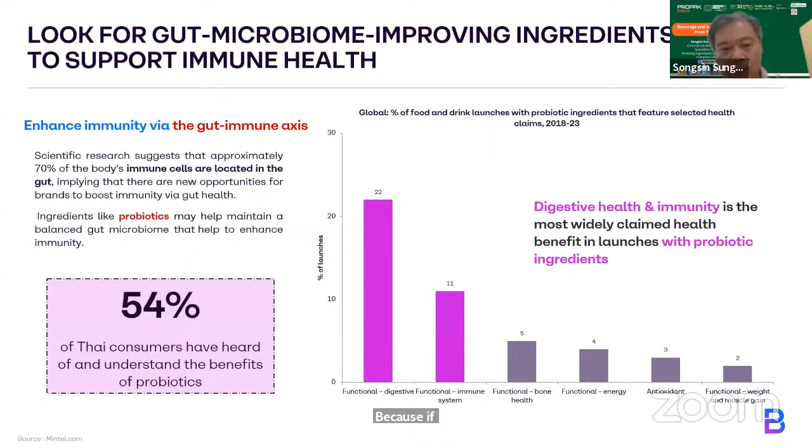And these are the products in Thailand which are already launched. All are Thai products, and all use or claim to have added probiotics for immune and gut health benefits. On the left-hand side we have a beverage product called Vitaday, which is very popular in Thailand. Then from Took One Thailand, the product is green tea honey kombucha. Kombucha is considered pre-probiotic as well. And then plum sparkling from Body Absolute Thailand.

This one is also fortified with probiotics, which also helps the immune system. And the last one is a product from the company Tera Food, a smoothie, which is very interesting because they are quite successful with the smoothie product type. They launched a series of functional beverages into the market, and it's a very successful company.

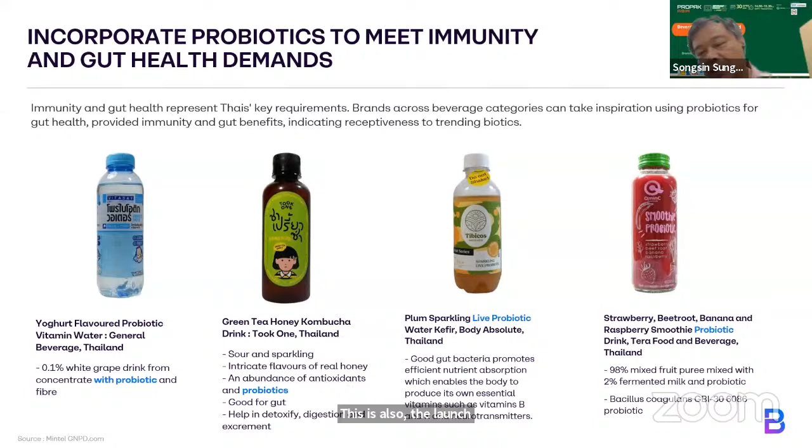And the next ingredient which helps immunity is protein. So why protein? Usually we think protein is for bodybuilding, helping you build body or repair muscle and everything. But people also believe that taking care of your protein intake helps build up body mass and lean body, and can lead the body to be strong and resist infection and protect against illness, including having good immunity to help fight disease.

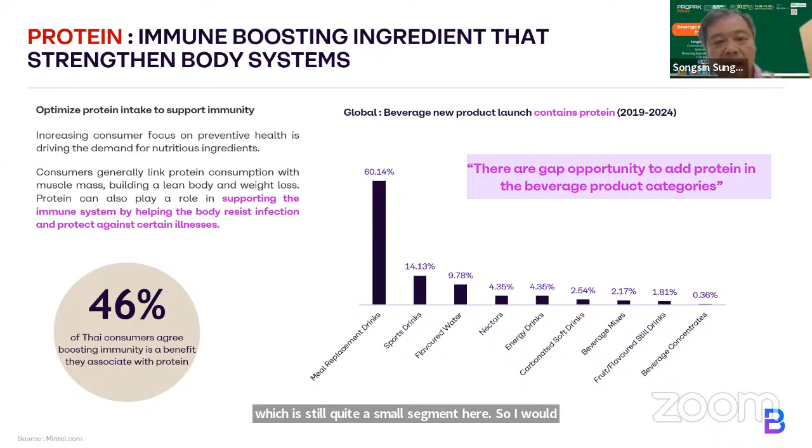On the right-hand side you can see that for the opportunity to add protein or a high protein claim in beverages, the top one is usually meal replacement, which is still quite a small segment here. So I would say there is a big gap here in Thailand for beverages with high protein content to launch into the market.

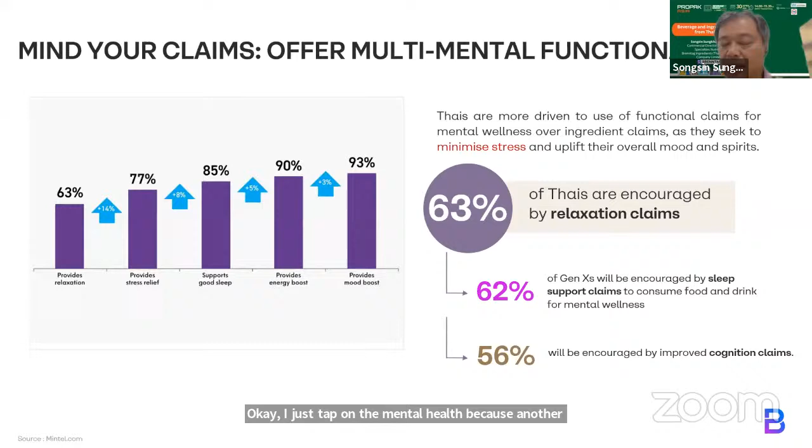Okay, I'll just touch on mental health, because another issue is that everybody is stressed. I'm also stressed. I think everybody here today is stressed because it's overtime already. So I'll go quickly now.

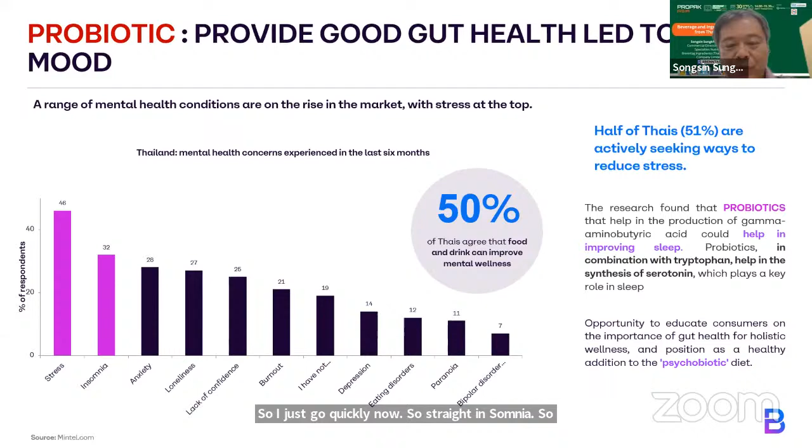So stress, insomnia. 50% of Thai people agree that if there is food and drink that improves mental well-being, they would be very interested. And some of the products already launched to the market, these are some examples. In fact, these are mostly coming from overseas, especially from Japan or Taiwan, which are very far advanced in the mental well-being sector.

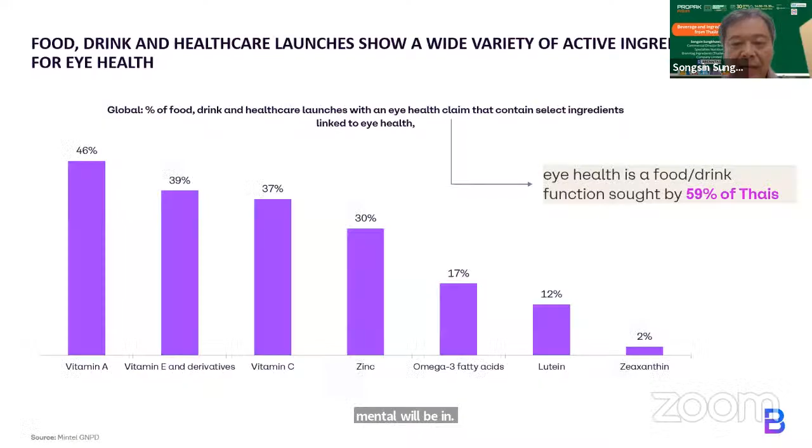And I think that's it. Oh, sorry, I thought I was done already. So I'll just skip, because in fact everybody knows it very well. So I've got to stop here because I think it's too much overtime already.